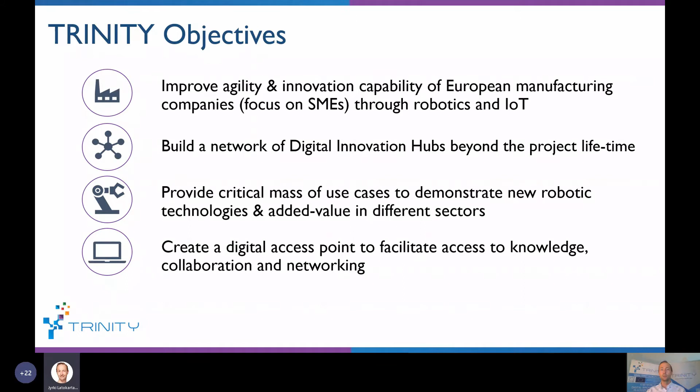industrial or company demonstrations. Okay, so Trinity is a Horizon 2020 funded project where our main goal is to improve the agility and innovation capability of European SMEs through robotics and IoT. And as all the digital innovation hubs, one of our goals is to build a digital innovation hub and a network that also exists after the Trinity project that will support the SMEs on these very topics, and they have a one-stop shop for companies to find information also after our project.

Trinity Consortium has 16 partners from 10 countries, so we represent Europe fairly well. We have altogether 9 research institutes and then companies and other organizations that support our Trinity goals. And we have 3 thematic areas where we focus in Trinity. Those are robotics, IoT technologies, and cybersecurity. So basically, all the activities are in these domains, and our focus is on agile manufacturing. There are other sister projects on robotics that work on maintenance and infrastructure, agri-food, and so on. But Trinity DIH together with DIH Squared is focusing on agile manufacturing.

Our concept is quite pragmatic. So the idea of Trinity is to showcase existing research results from different European projects, and those are so-called use cases; the core consortium of Trinity has presented 18 of them. And these use case demonstrations consist of different modules that we are polishing and making easier to adopt for the SMEs during the Trinity project.

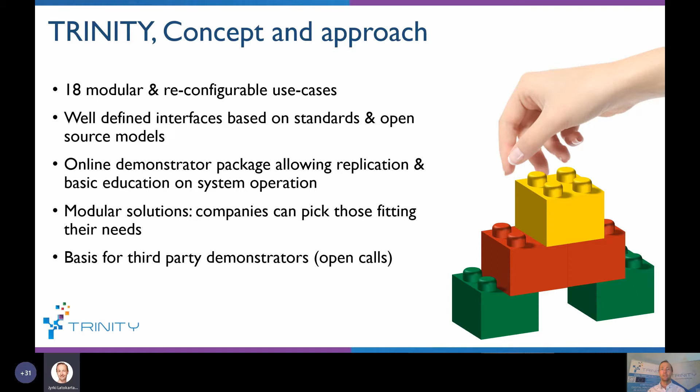We are now in demonstration program 1, which started this summer, and it will last for 12 months. And today, all the talks we hear are from the consortiums of our demonstration program 1. It was quite popular. We had 115 applications from 27 European countries or related countries in Horizon 2020. So altogether, nearly 300 companies applied for the funding. So it was quite a lot of work for the open call evaluators, technical and business experts, who evaluated the proposals for open call 1.

And then finally, after the checks and selecting these applications, we funded 19 proposals that cover 44 beneficiaries from 14 European countries, which you see on the map on this slide. And the total requested budget of these demonstrations was 4.66 million euros. They started in July, as mentioned, and they will last from 9 to 12 months. So the first quarter of the demonstration program is now completed.

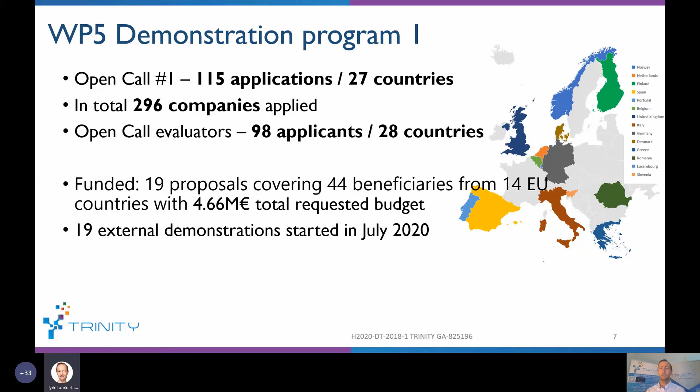From Trinity's point of view, each of these companies and consortiums that you will hear presentations from in this series of webinars has been assigned a mentor from the Trinity Consortium, and this has been quite successful, at least from the Trinity point of view. We now have much closer contact with the companies doing the demonstrations for us, and hopefully we as the consortium can also support them better, because we have some companies who have never received EU funding before or have not necessarily done much R&D activities in their work, so they can get different support from these mentors and hopefully succeed better in their own goals and in their future businesses and activities.

Before we start going into these demonstrations, a quick mention about Trinity's second open call. So during Trinity's 4 years of running, we will have 2 open calls, and the timeline for the second open call will be published in November. It's similar to the first call, but this time the maximum funding is slightly smaller, and we hope the demonstrations to be slightly shorter. The total budget for this second open call is 3.5 million euros, and we try to enhance the European dimension even more, so we are looking for multinational consortiums in our second open call.

Thank you for the introduction. I will now share my screen. My name is Halldor, I'm working for the Arctic University of Norway as a research assistant, and I am a developer for the Trinity project. I will talk a little bit about metal 3D printing, then about our internal use case, robotic welding and additive manufacturing.

3D printing is becoming more and more used in today's industry. However, it can be extremely expensive to invest in a large metal 3D printer. One example we have from UIT is that we have bought a hybrid 3D metal printer, which is able to print quite large parts with metal powder. However, the machine is extremely expensive, and also the powder is very expensive. Another method might be to use...

automatic robotic welding, combined with wire arc additive manufacturing, or WAAM, to 3D print parts using an arc welding process to create 3D metal parts. The benefit of using a robot arm is that you can print parts as large as the robot itself, which increases the flexibility, and you can also use it to repair parts. It can also often be very inexpensive to buy a second-hand robot and a welding torch, and then you can have potentially a metal 3D printer.

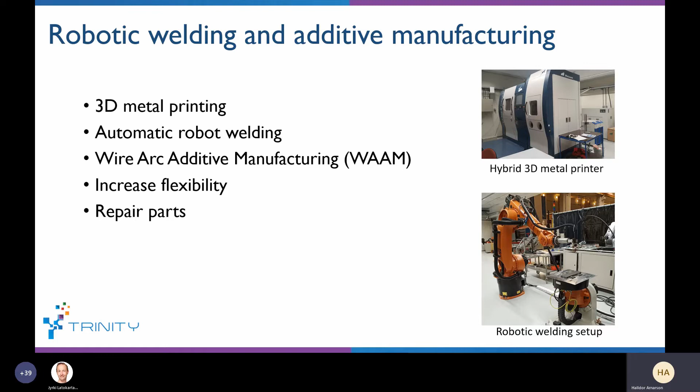Here at UIT, we are developing use case 5, an internal TRINITY use case, which is wire arc additive manufacturing with industrial robots. The setup of our system is that we have a KUKA robot, and then we have a rotary table. This enables us to do more advanced welds.

We also have a TIG welder. What is special about the TIG welder is that the robot usually has to move in the direction the wire is fed, and therefore having the rotary table enables us to do, again, more advanced welds. These three components, the KUKA robot, rotary table, and TIG welder, are connected to our KUKA controller. This is then part of our physical system.

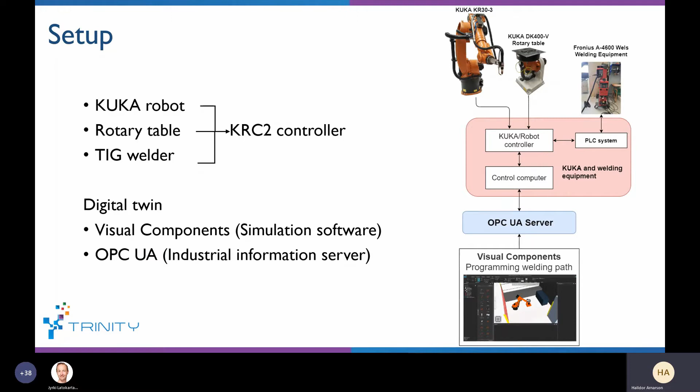We have then created a digital twin of our system, a digital counterpart, in Visual Components, which is a simulation software where we have created a replica of exactly our robot cell. However, to be able to connect our physical part and the digital part, we are using an OPC UA server. This is just an information server for sharing information both from the robot to the simulation software, but also from the simulation software to the physical robot.

So using the simulation software Visual Components allows us to use its functionality, which has a rather intuitive and simple programming method with drag and drop function, but it is also able to automatically generate paths. So if you have a CAD model and a path you wanted to move, you can press on the curve and it will automatically generate this path.

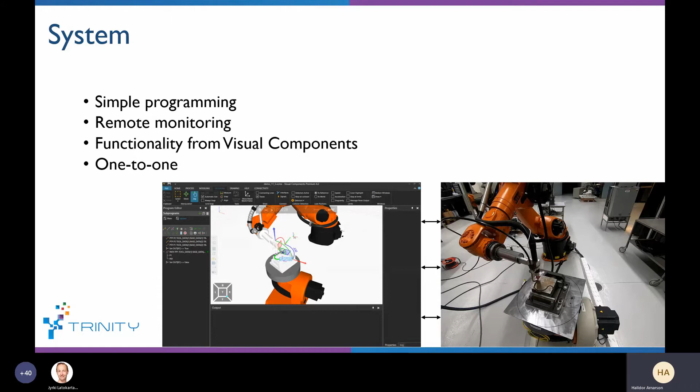You can also use the system to remotely monitor the robot while it is moving and welding, and again we get all the functionality from Visual Components. Visual Components has also been starting to add VR functionality, which we can add to our system to create an even simpler method of programming the welds. The system is made to be one-to-one, meaning just that 1 meter in the simulation software is 1 meter in the physical one.

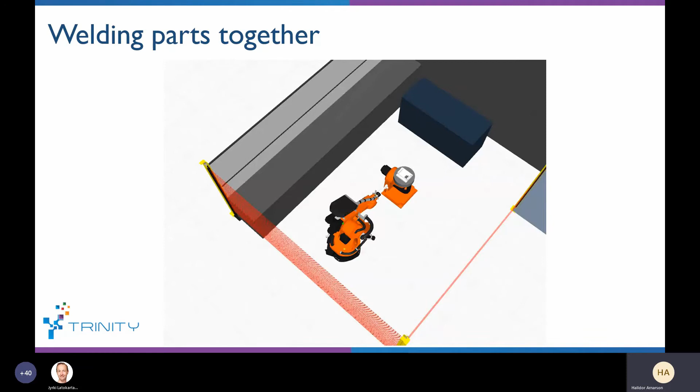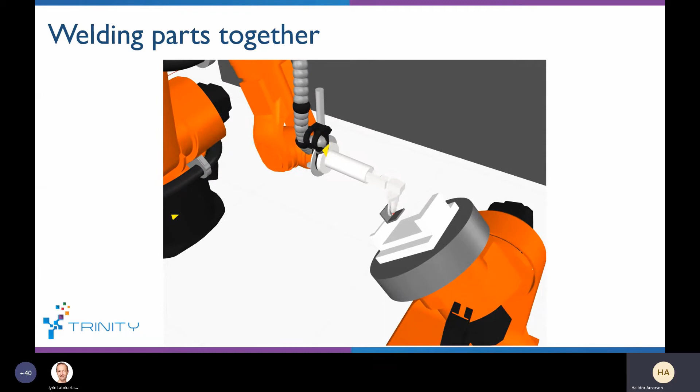Here I have a short video showing welding two metal plates together. So here we're running a simulation. This is to validate and reassure that the program we have created is right, there's no collisions, and it looks okay. And then afterwards, we can directly run this program, which we have created in Visual Components, straight on the physical robot without almost any intervention, which decreases the time it takes to program and set up such a system.

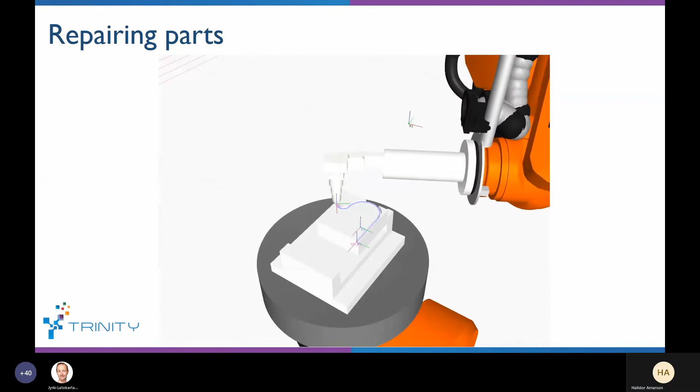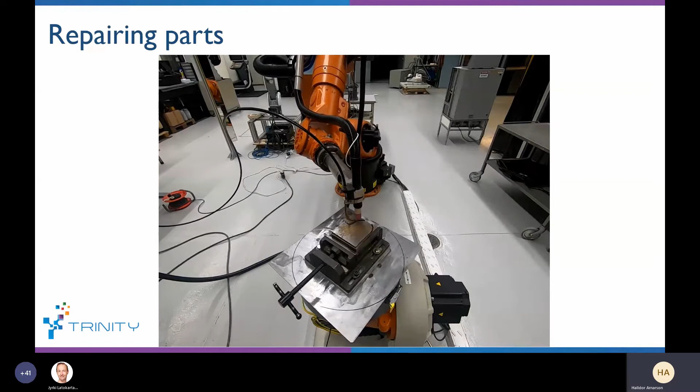I also have a second video showing using the path function. As I mentioned before, we can press on a curve and you automatically get the path the robot will move. This is to show filling up the gap by using welding, for instance, for repairing parts. And then afterwards, when you have programmed it, you can run it straight away on the physical robot. This time it's without the welding on, because you can't see too much of the movement, because the light is so bright.

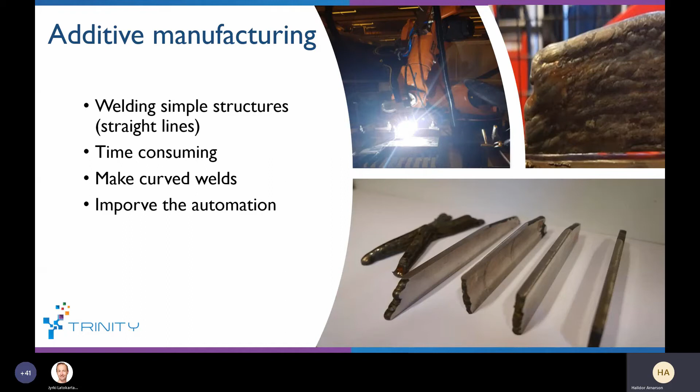So additive manufacturing, this system is also capable of creating structures. In Visual Components, we can create and 3D print simple straight lines, which we have done before. Our old program only allowed for straight lines, but since we have Visual Components now, curves. However, one problem we are having is that the process of doing this arc TIG welding is very time consuming because of all the heat. So one of our goals and what we're going to continue improving is to increase the automation of the system, to make it more automated, but also be able to create parts faster and also more complex and bigger parts than you can see here on the pictures.

So the benefits of our system. As I mentioned before, one of the benefits is easy planning and also having the ability to do offline testing. With our system, you can be somewhere else in the world, practically, as long as you have Visual Components. You can configure and make a new welding program and send it directly to the robot cell, which increases the flexibility quite a lot. Also, the method.

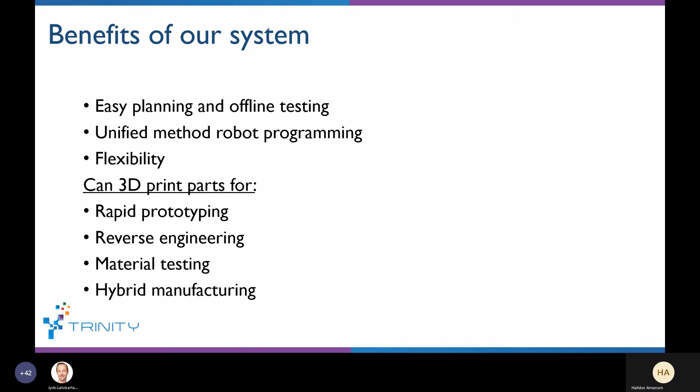And also the 3D metal parts that we print, we can use for both rapid prototyping. We can also do reverse engineering, material testing, and also hybrid manufacturing. Yes, that is it for me.

So there is a post processor in Visual Components, so I'm able to read all the points and all the XYZ coordinates of the program created in Visual Components, and then I take all of this data, also the speed. I have my own Python program which takes the data and sorts it and then executes it on the robot. So I have kind of my own Python translator that takes all the stuff from Visual Components and puts it straight on the physical one.

I have a quick question regarding the control. So basically I see there's a turntable, right? And it's moving according to, like, it's actually complementing the robot movements. My question is, how do you control that turntable and how is it synchronized with the robot?

Yeah, so here we come back to Visual Components. The great thing about Visual Components is that there is this drag and drop function, so you can just add the rotary table to the robot directly, and then it's kind of a part of it. So then you just have to jog the table and the robot, and then they all move simultaneously, and you can create very advanced movements, but in a very simple manner using Visual Components.

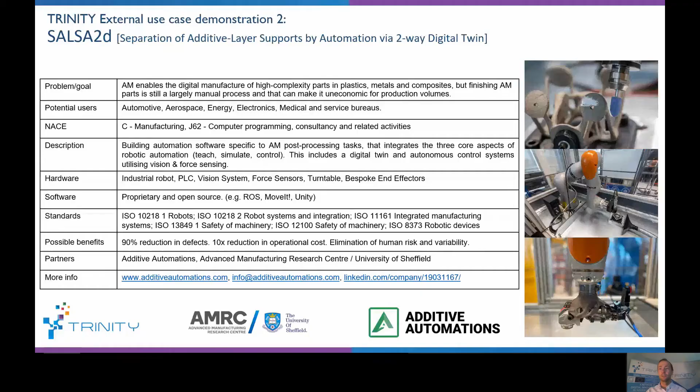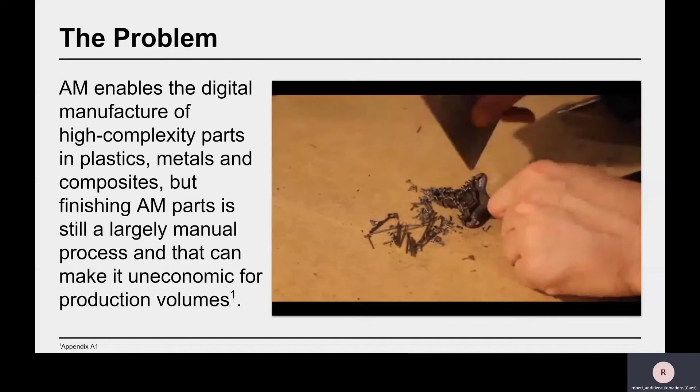Screen is yours. Good morning, everybody. I'm talking to you at the moment from the heart of Britain, up in the north of England, called Sheffield, also known here as the Steel City, actually sitting on top of some infamous Orgreave mines, which changed the landscape of industry in this country about 35 years ago. Now it's one of the most concentrated advanced manufacturing parks in the UK. It's got some companies such as McLaren, Airbus, Boeing, Rolls-Royce, and it also includes our partner who's also on the line, James Law, representing the University of Sheffield. We're working with them on this, and obviously with Trinity.

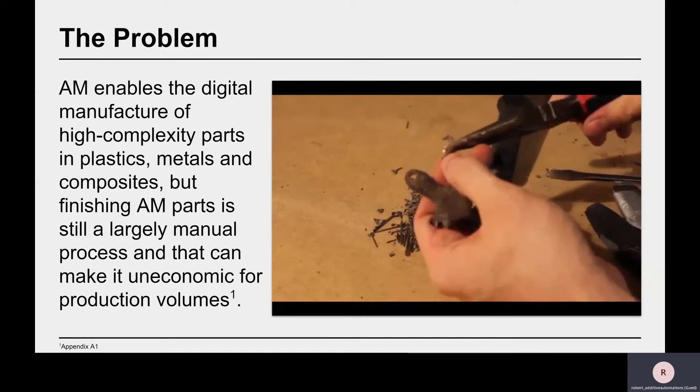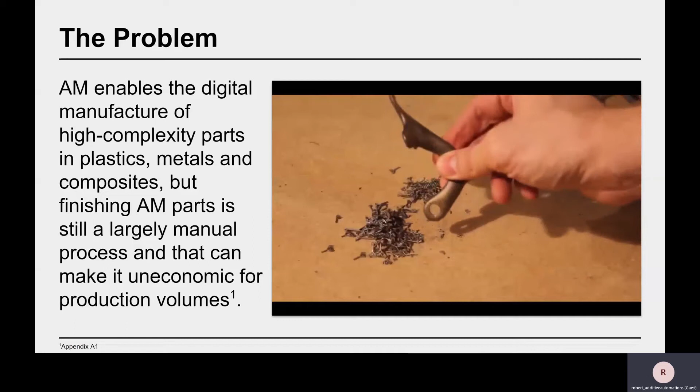So the problem that we're trying to solve in this project and the wider company is: AM enables the digital manufacture of high complexity parts in multiple materials, but finishing those parts is still largely a manual process, and that can make it uneconomic for production volumes.

So the mission is, A, eliminate the barriers to entry for using AM in volume production; B, complete AM's digital thread by automating those manual, dexterous and toxic steps; and C, bring dexterity and reasoning to industrial robotic arms through AI, vision and sensing systems.

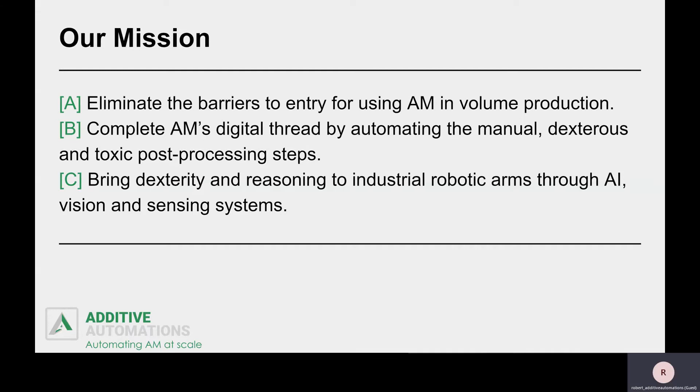Some of the benefits of the system will be: one, since a major source of defects is human error, a 90% reduction in defects across post-processing. Two, robots can do repetitive, mundane, strenuous tasks for longer and more efficiently, leading to a 10x reduction in operational costs. And also the toxic powder, such as nickel, cobalt, chromium, and some of the nasty tasks that can cause RSI - basically eliminating that, so humans don't do those and can do more of the creative tasks.

Our USP is that the economics of logic-driven or traditional automation doesn't really stack up for additive, for many reasons. So we're creating autonomous control systems using vision and force sensing to do that, and we're creating a software application - one that's integrated to do teach, simulate, and control, all from that one application.

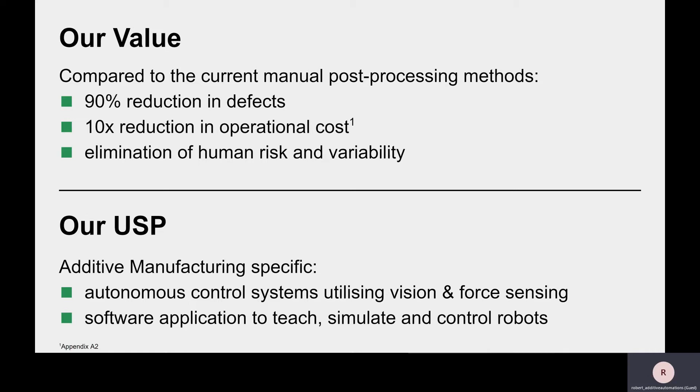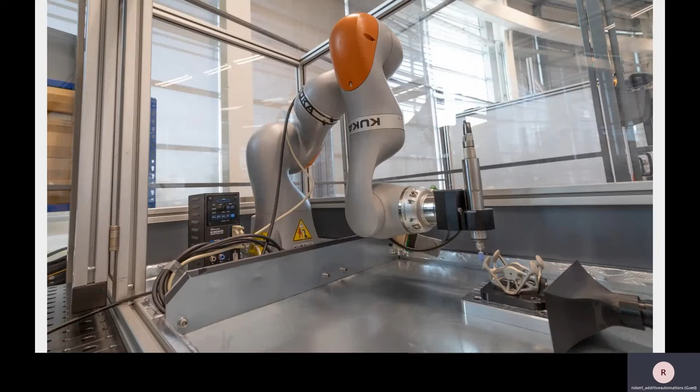So to really summarize the solution, it's all about building automation software that is specific to AM post-processing, integrating the three core aspects of robotic automation - teach, simulate, control. You can view more photos and videos on our website. This is our cell in one of the factories the University of Sheffield has. This shows one of the end effectors and one of the parts we're currently working on, which is a satellite bracket for aerospace.

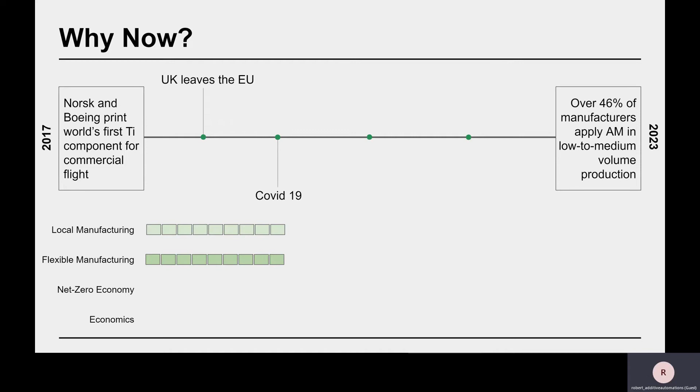Whether we like that or not, it's a fact. There are other factors, such as the US - and I'll get onto this - banning Huawei and other Chinese companies, and we do need to look at reshoring manufacturing. I think COVID-19 has again shown that reshoring manufacturing is important to manage that supply chain risk, but also have a flexible production line - the UK ventilator challenge, Boeing printing thousands of face masks in dozens of locations across the US.

Huawei, again, as I said, was banned in the US and in the UK, and is again another supply chain risk. So local manufacturing or reshoring of manufacturing. And for me, the most important, which is a net zero economy, additive manufacturing has huge capability here. It's got design freedom, it's got near net shape capability. So you've got opportunities for lightweighting, thermal efficiency optimizations, near one-to-one buy-to-fly. And you can change the product life cycle to prioritize refurbish, repair, and recycle.

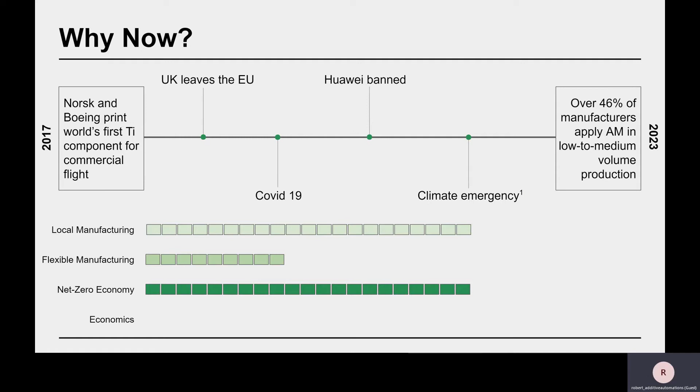And this one here is most important for me, this climate emergency, and to try to solve that. But we won't be able to get to this prediction of over 46% of manufacturers applying AM in low to medium volume production by 2023, unless we sort the economics out. And that means really reducing the current cost by a factor of 10. And that's going to be a combination of materials in AM, design, the actual additive process, but also automation. And that's what we're using robotics for, to really bring that cost of post-processing down by a factor of 10.

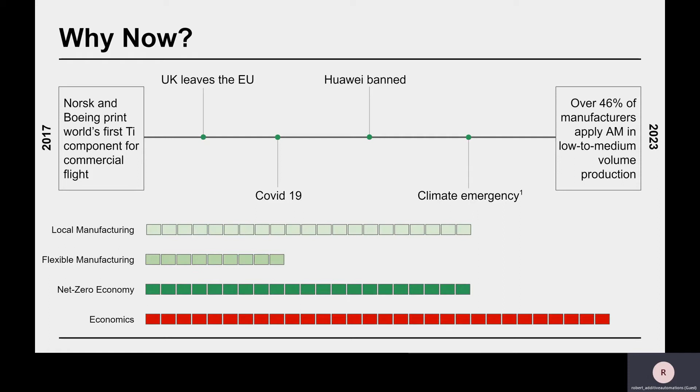And that's us. And that's our vision, really. In pursuit of a digital and sustainable future, we automate the additive manufacture of polymer, metal, and composite products. And I'd be happy to answer any questions.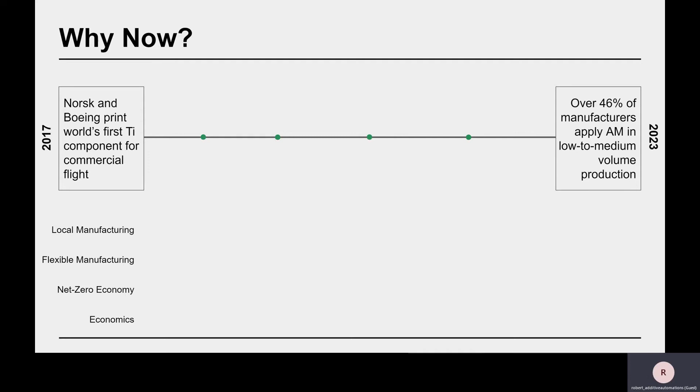From a technological point of view, what do you think are the most challenging things to solve if we think about robotizing these processes? Yeah, it's a really good question. I think the most tricky part here is control. And that's going to be partly solved with sensors. So we've got these 4 sensors and 2 vision systems, and that's because we've got quite complex parts, and parts that change between builds, but also within builds.

If you've used additive a lot, you'll know that not only does one build to another change in terms of tolerances, but also within the build, depending on where you build in that chamber. You can have quite different deformations and distortions, and while the parts still may conform, you need the robot to be able to adapt. And how do you do that without reteaching? Well, the answer is you can't.

So you need to bring human capabilities like dexterity, reasoning, real-time feedback, to a robot. And the only way you can do that is with sensors. So we're trying to do a hybrid approach with position, local and global position, and force sensors. And that's going to be the most challenging aspect of this. Sure is, yes. It involves a lot of sensors and calculations. So it's not just a simple machine tending application for sure. There's quite a lot of things involved.

Yes, the post-processing, the depowdering, platform removal, support removal, witness removal, these tasks between the print and the machining. Not all parts need machining, sometimes just inspection, but everything that happens between print and machining, or print and inspection, that's what we want to automate.

Tom is going to talk to us about laser cladding, also a very interesting project, but still quite a niche area, requiring quite a lot of specific expertise from the operators and the users, and also having a lot of very sensitive parameters which, if not controlled correctly, may damage quite an expensive process and workpiece. So go ahead, Tom.

Yes, hello, good morning. My name is Tom de Bruyne from Laser Cladding Venture. We are very happy to be part of the TRINITY Consortium. And our project is the LMD-AUTO project with the objective to automate laser cladding.

Good. You can see my next slide? No, you can't see it like this. Yeah. No. So laser cladding.

Our company actually offers two things. We do R&D in 3D printing with the technology, but our main industrial activity is wear protection for critical assets. The example you see here is a petrochemical barrel of a compounding installation, and typically we would line it with, for example, Stellite 21, which is a cobalt chrome alloy, and in the laser cladded state it features extra hardness, so it creates better wear resistance. The technology that we use is laser cladding.

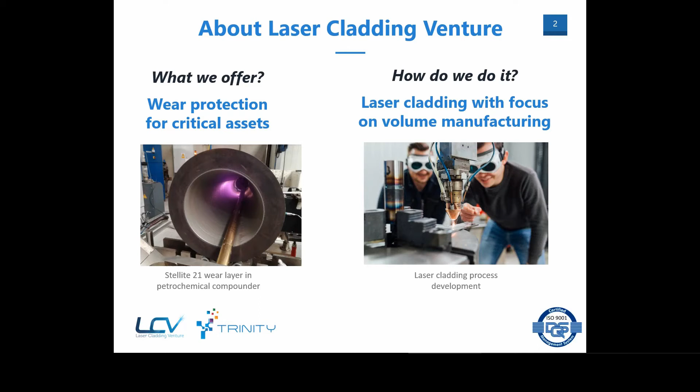And basically, for us the focus is that we do not apply it for repair applications, but mostly for volume applications. That's our goal. If you see the opportunities we have, then I think we have a strong USP in that hard-facing niche, but we also have challenges.

The USP is that with laser cladding, a welding process where you apply laser power and you create a specific metallic structure, a bit across the board, laser cladded coatings are up to 20% harder than conventionally welded or thermally sprayed coatings. It depends a bit on the material type, but in general you can expect extra hardness.

And what we also see, both in lab testing and in practice, quite often the extra hardness or the better metallic structure results in an improved wear resistance, up to 4 times or even 8 times we saw already. So it's a strong USP. But on the other hand, there are still definitely problems and issues.

To really apply this USP for volume applications, we need to improve the uptime of the machines. I think machines in a factory environment should have 80% uptime, to combine productivity together with flexibility. The yield loss should be below 1%, and ideally in per mille. And also the machines are actually not turnkey, so it's relatively difficult to have them active 24/7.

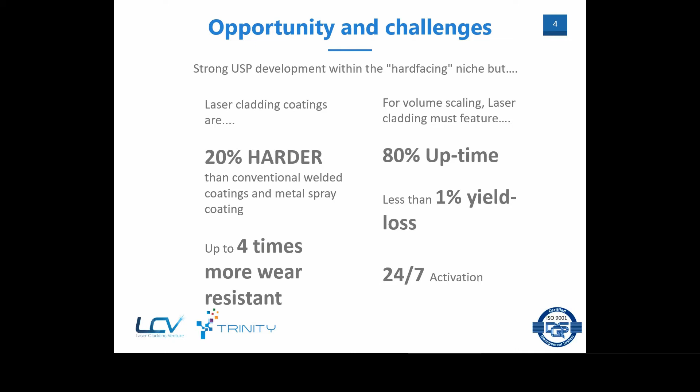Good. So if you look at the technology itself, it's actually two things. It's a welding process. We use laser power, we project metallic granulate, powdered material, and we melt it on a substrate. You see how the process looks, and we apply a wear-resistant layer. Basically, if you control the quality of the melt pool, then you can control the quality of the clad.

Another thing is the upstream process. The upstream process is, basically we have a robot that controls the laser cladding head, and typically also a motion system for the substrate. We have a powder feeder, we have a laser, connected to a controller. These are the elements of a laser cladding installation. To control the quality, you need to control the upstream process, but also the downstream process.

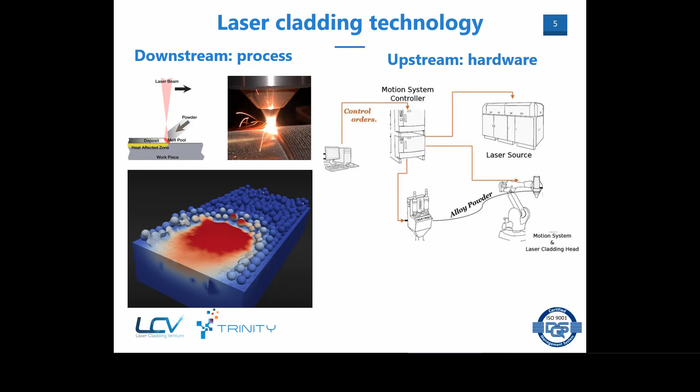If we look from our experience at what the problems are, first of all you have quite a lot of failure modes, also because we use high power lasers between 1 kilowatt and 12 kilowatts. You can have upstream problems, for example overheating of the clad heads, problems with the feedstock, with the powder feeder, etc. But you can also have downstream influence of the substrate, your welding process can become unstable, etc. So you have quite a lot of failure modes that can affect the quality of the clad.

The second thing is that, as we do it today, the process is really operator driven. It's the operators who load the machines, who set up the machines, and it can be quite cumbersome. And it's also the operators who are checking the process every 5 or 10 minutes to see if the melt pool is stable, to check a number of sensors in the installation, etc.

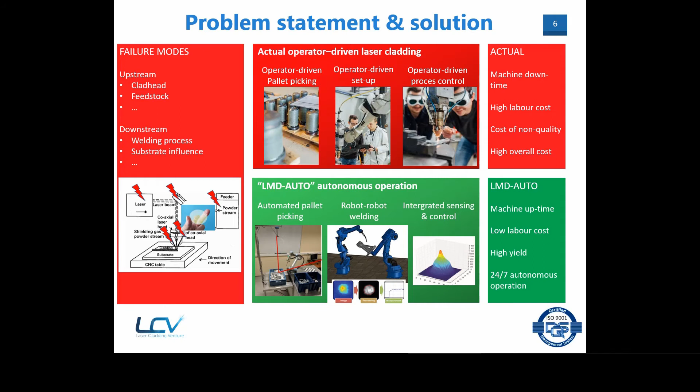Good. Then, if you see the objectives, I think probably the most innovative objective for LMD-AUTO is to enable the turnkey operation by process control. And the crux is really that we have quite a lot of process know-how on laser cladding with the engineers and with the operators, and we want to implement that knowledge inside the machines using Industry 4.0 technology.

So it means that there are a number of sensor technologies, both used upstream and downstream, welding procedures and methodologies to control and correct the clad. Experience that we apply today, work instructions, etc. And we want to implement that into the machine. So what we're doing there is we have a controller box, we have sensors, and at the moment it monitors. There are already alarm functions, and we want to migrate to active control.

The first step is that we, as I said, first apply the existing experience and working methodologies that we apply today in the operator-driven operation of the machine. We want to apply that into the software model. I think the next step is that we will make true use of the large data quantities that we gather to achieve more insight into machine operation and the quality of the clad. And then what we think is that all the expertise should be inside the machine, and that will then enable a shift from white collar to blue collar.

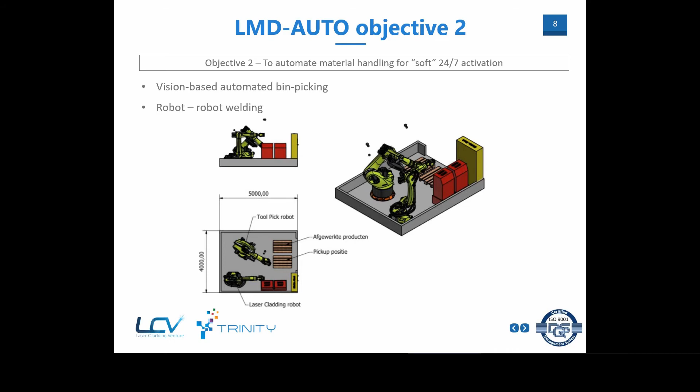Then there are a number of other topics that we also could work on within this LMD-AUTO concept, but they're a bit outside the scope of this TRINITY project. Good. Thank you. That's my part of the presentation. So if there are any questions, I will be happy to hear them.

Yes, thank you very much, Tom. We still have some minutes for questions and discussion. I guess the process control you are planning in TRINITY is something that can be applied for other similar processes as well. But for the second objective, on this bin picking and robot welding, have you had time to test it yet, or do you see it as a simple task to complete, or what kind of challenges do you think there are in that approach?

Yeah, I think ideally you have one system that has the flexibility to deal with a number of different parts and geometries. We tested it already on lab scale, and there you see indeed part recognition and so on works very well. The other thing you see is that there is a difference between picking up a part and completely aligning a part so that you know this is the starting point for my clad, for the CAM program. And there we see there is still a challenge on how to completely do alignment after the part is picked up automatically, and knowing the exact start position for the clad program.

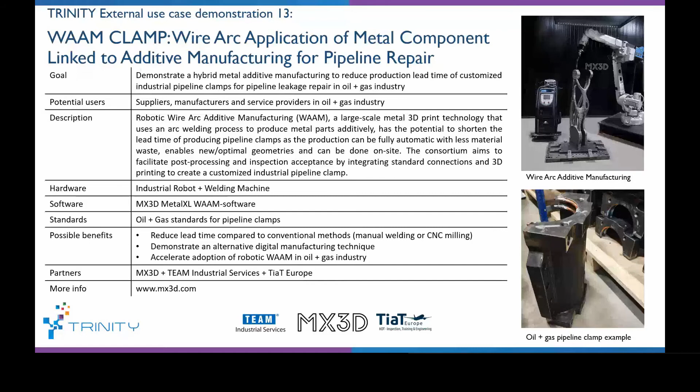All right. Thank you for the introduction. My name is Thomas van Klaarbeke. I'm an R&D engineer for the 3D metal company MX3D. MX3D does large-scale additive manufacturing. And within the TRINITY project, we have two other partners to tackle the production of components for the oil and gas industry, more specifically clamps for pipelines.

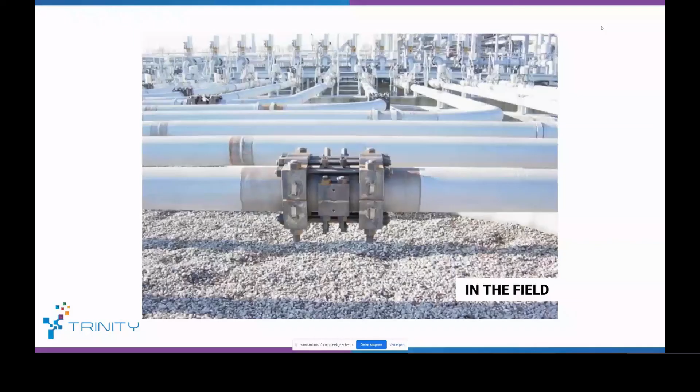So what are these clamps for pipelines? Well, there are many different types of pipelines that transport different types of fluids. This can be water, but this can go all the way to very corrosive or dangerous materials. These pipelines, of course, need maintenance, and sometimes a leak can be expected or a problem can be projected. In that case, the pipeline needs to be fixed, basically bandaged, just like pipes in your sink. If you have a hole, you need to patch it up. But in the oil and gas industry, this is on a much higher level and in a more secure way.

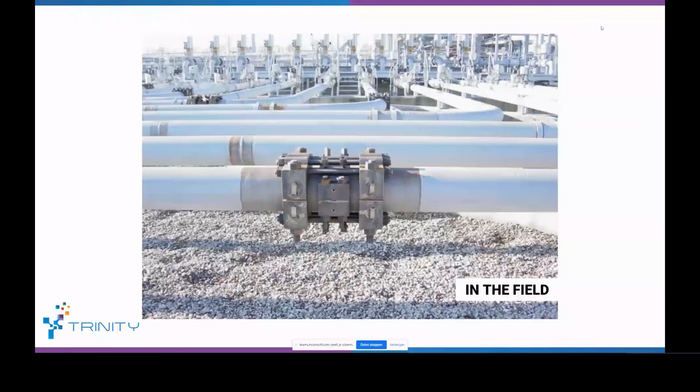So if a leak is expected, these types of clamps are rapidly manufactured and put on the pipeline. In an even worse case scenario, when there's already a leak, the pipeline is shut down, and this can cause losses of hundreds of thousands of euros to even millions of euros. If an oil company shuts down production, it costs a lot of money. The production of these clamps needs to be done rapidly. Currently, this is done either with traditional manufacturing such as CNC milling, so these blocks are milled from slabs of metal, or they are manually welded from sheets of metal.

And this brings me to the group we have established for this consortium. The first partner is Team, who is currently designing, manufacturing, and installing these pipeline clamps. The second party is MX3D, responsible for large-scale additive manufacturing of metal components. The third partner does NDT inspections of metals and other materials.

So first of all, Team: currently they are using CNC manufacturing, so they're manufacturing these clamps from metal slabs, or they're using manual welding. Of course, there are many different values that come into play when a clamp is produced, such as the design. This could be a material with very high standards that needs to have a lot of certifications, and then already a certain preferred design and material grade is picked.

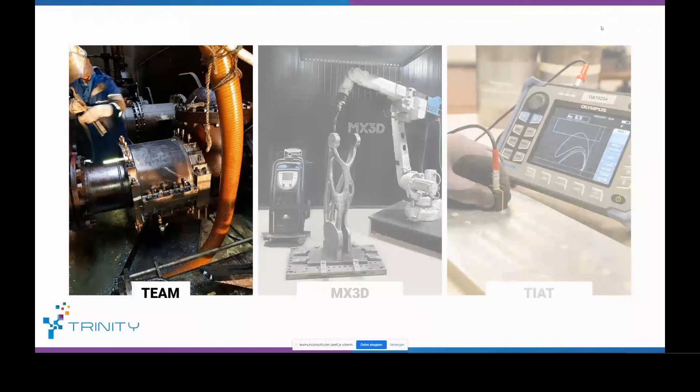But it could also be that it needs to be installed very quickly, and that there are more manual welders available, so then they could opt for a different production process. So depending on the request, a different manufacturing method is chosen. Of course, these are always produced very rapidly, but there are always things to improve, such as material usage, or, for example, downtime, or smarter planning of resources, in case, for example, certain machines are already booked, etc.

The second party, MX3D, that's us. We are experts in additive manufacturing. What we do is basically create 3D metal shapes additively. So we're not subtracting from metal slabs, but we're building them up. And what we are using is wire arc additive manufacturing. This means we are using a standard welding machine, and we are basically putting down weld on top of weld on top of weld to create geometry.

So what you see here is a component for the heavy industry. It's a machine part, and this consists only of welds. And WAAM is known for being a very fast production process, because it has a production rate between 1 and 7 kilograms per hour. So this part in front of us is about 90 kilos, and it had a printing time of about 4 continuous days. So this is considered very fast for metal printing.

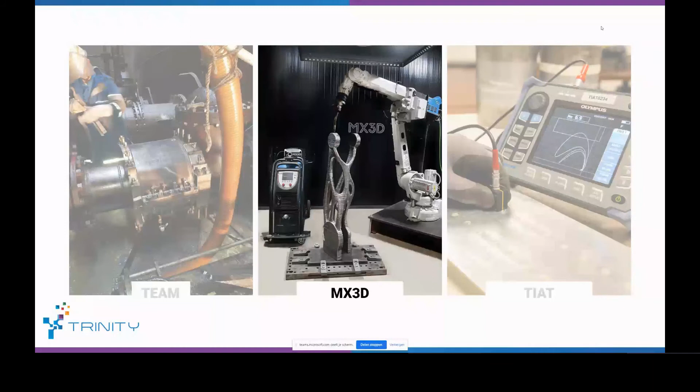The third party involved is TIAT. They're responsible for NDT, so non-destructive testing, and they do the inspecting and certification, so to say, of these materials. So depending, of course, on the requirements of the clamp, TIAT can give their approval that it meets its requirements.

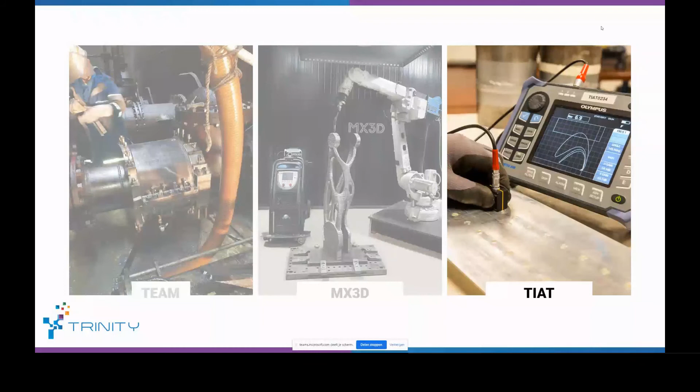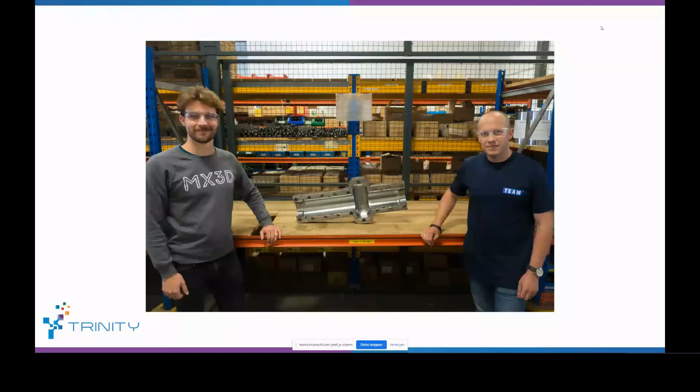So for the Trinity case, we are currently looking at the many different clamps that Team is producing and installing. These can range from very small pipes in diameter to very large ones. And of course, certain manufacturing methods are more beneficial than others for certain dimensions. And currently we are orienting ourselves where WAAM and the existing production methods meet best for what shapes.

To give you an impression of what WAAM can do, here we have a pipeline connector, which is fully additively manufactured. And it had, I think, a printing time of about 1 or 2 days. So this shows how the technique can be used to create spare parts or replacement parts very instantly. And because we're using welding wire and robots, this can be done in many different locations. So this is an added advantage as well.

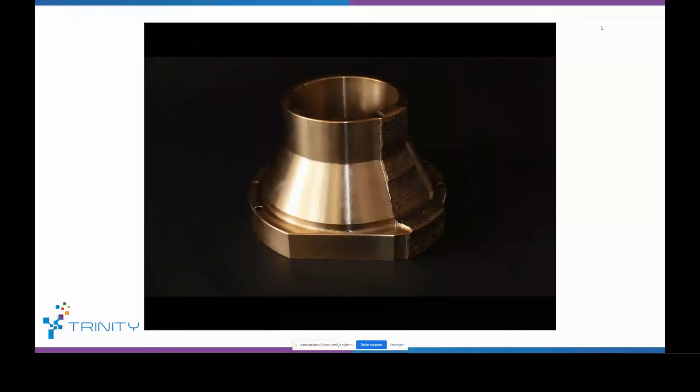So if you're thinking about remote areas or areas on the sea, for example, you could have a very flexible manufacturing solution that can create many different parts. Instead of having, for example, a milling machine where you can only trim down metal blocks to a certain dimension, you can now build them up to however large you want them. And instead of having manual welders available, skilled laborers, which is unfortunately a skill that is harder and harder to find, WAAM can provide an automated replacement solution.

So as I was saying, we're now looking at the many different types of clamps that are being used, and we're orienting ourselves together with our partners in the industry. And our goal is to provide an alternative manufacturing solution to the existing options. So to the existing CNC milling or manual welding, we want to do a hybrid approach where we use the advantages of each process. Well, mainly CNC. We're not thinking about manual welding anymore because we want to eliminate that.

So we want to take the advantages of CNC milling, which is, of course, being able to very precisely fabricate metal objects. And the downside of CNC milling is the material wastage and, of course, the size of slabs you need. The advantage of WAAM is that we can print whatever we need at a very high pace. But one of the disadvantages is that it's near net shape, it's welding. So it's relatively rough compared to CNC milling.

So for the Trinity project, we're looking at what we can do for the oil and gas industry for the flexible and automated production of oil and gas components. And together with our third partner, TiaT, we are also looking at how we can certify the production of these components, because metal AM currently is in the beginning phase of certification. So this is definitely a first step towards it. And we believe that with our consortium we can provide the base steps in providing these manufacturing methods for the industry.

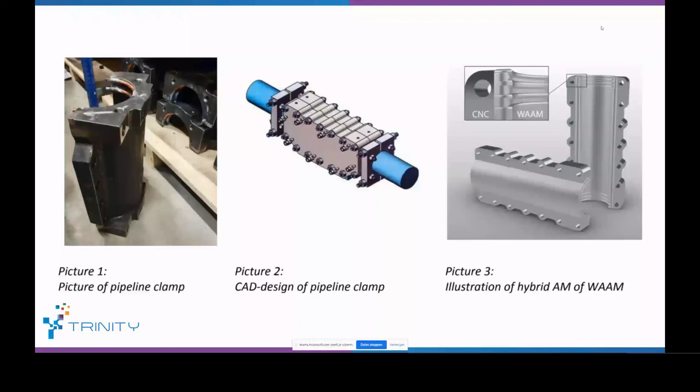As a final slide, maybe our one-pager. Our goal for the WAAM clamp project is to reduce the lead time compared to other methods. Of course, we're not going to be able to reduce the lead time for any type of shape of pipeline clamp, but we have a few in mind that can benefit from it.

We want to demonstrate our alternative manufacturing technique where we combine CNC milling, or computer-operated processes, together with wire arc. And together with TiaT and the whole partnership, we want to accelerate the adoption of WAAM technology in the oil and gas industry, because it's in a very early phase. We believe that by printing a demonstrator clamp and proving its quality features, this will be a good step towards the right direction in adoption of metal AM.

So this was my short presentation of our WAAM clamp, and I'm looking forward to your questions. Thank you very much, Thomas, for the presentation.

It's a very good question. Residual stress is indeed a very big topic within the WAAM world. There are ways to avoid it to a certain degree, by designing in such a way that you avoid heat buildup in certain areas, or by doing intelligent path planning, so intelligent weld deposition.

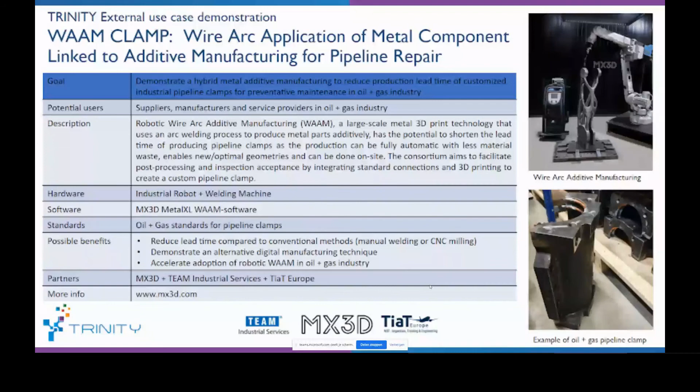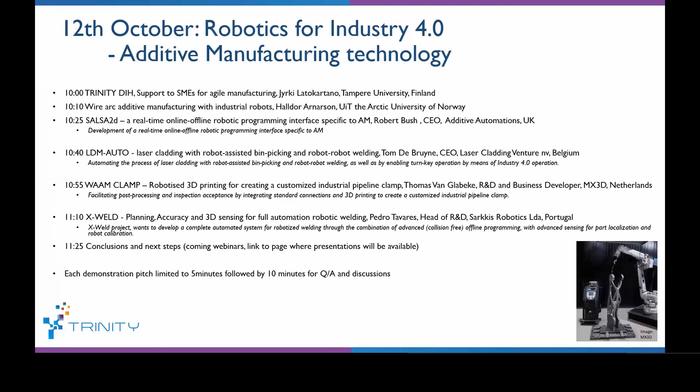This is X-Weld, presented by Pedro Tavares, head of R&D at Sarkkis Robotics in Portugal. All the processes we have discussed today are welding processes, so X-Weld fits quite well into this group, and there are some interesting technologies that X-Weld is working on. I think these 3D sensors for part localization and robot calibration can be used in many different processes, not only welding. But let's let Pedro talk more about it.

Thanks for your presentation of the project. Our objective is to tackle some of the difficulties that we typically find on the shop floor for steel industries and other industries, but in this scope, for welding in the steel industry.

I believe what I'm going to say now isn't new for most of you. Industrial robots are a mature technology. They are a catalyst for production. However, their full potential applications are still unexplored. This is why we can see this in the currently collaborative robot phenomenon. We can also see this when we compare the number of industrial robots against the number of machining equipment, and this has a reason for it.

During this project, we want to tackle the two main limitations in robotics and welding robotics. This is essentially the limitation related to the accuracy of industrial robots, and then the complex sensing procedures that are needed to automatically generate paths for the robot.

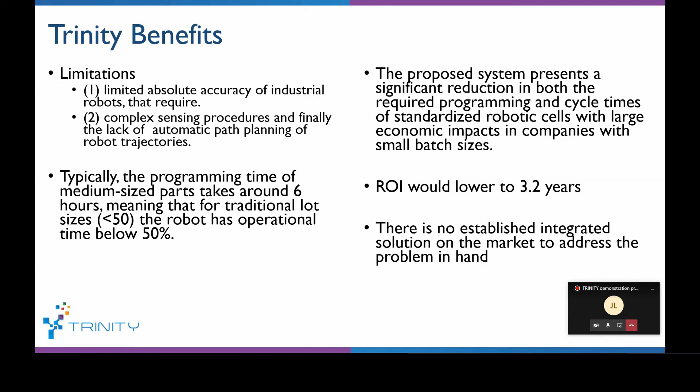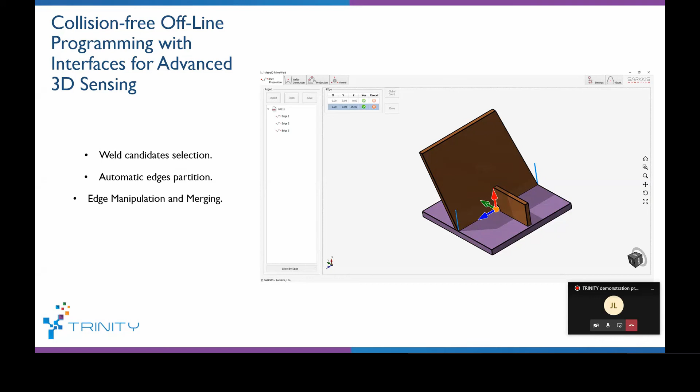So in that regard, we are going to diversify our solution into 3 branches. The first one is offline programming, where by parts we identify the welding candidates. We merge possible welding candidates and also take a 3D model of a part and detect where those candidates are, where you need to segment those edges, which edges are good to be welded, and so on. Then we generate collision-free movement vectors.

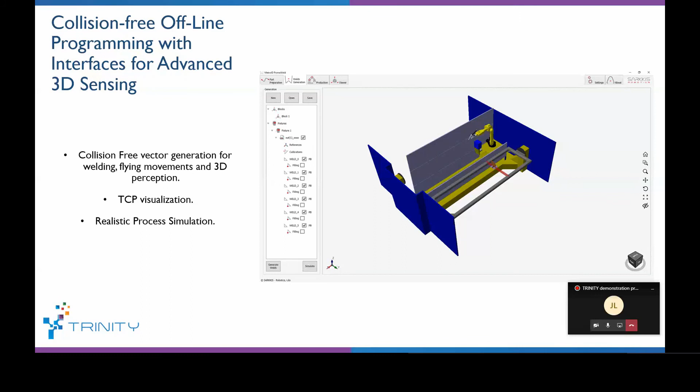Vectors for the robot movement, for welding, for 3D perception, and so on. In this branch, we are also able to see how the TCP behaves in every part of the process, and we'll have a realistic process simulation of what is going to happen in the real work cell. And then, of course, we will have a final tab that is able to produce and control the production of the robot, and control the machine and the robot itself.

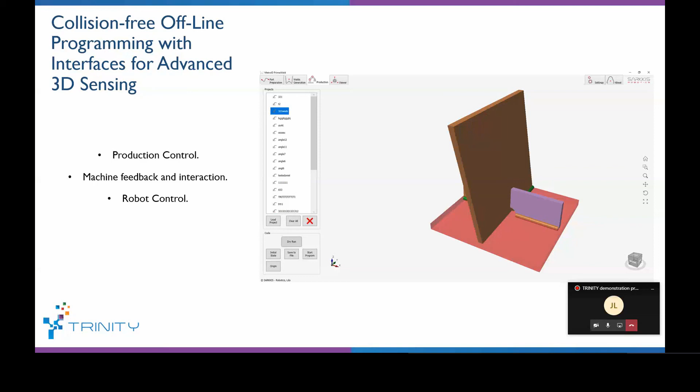This will be accomplished using active perception and sensor fusion. We can consider this as a result of integrating both local sensors and global sensors, and this will have a key part in the project as it will allow us to predict failures on the part and adjust the welding

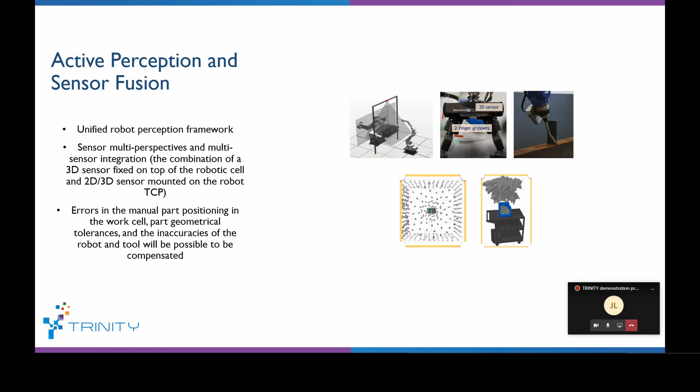seam. And then we will also have 3D sensing for robot absolute accuracy, where we can detect deviations. We can also detect deviations on the tool, and we can automatically calibrate that tool, which will be the welding torch.

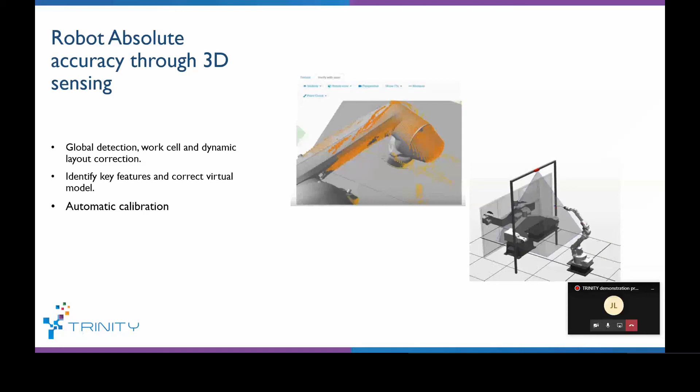So to have the local perspective of the sensing, we are exploring two segments of the market. One is the 3D low-cost small sensor, such as the Intel RealSense or the Orbbec, and the other is typical industrial lasers. This can be laser lines or laser dots, but we believe both approaches have some qualities.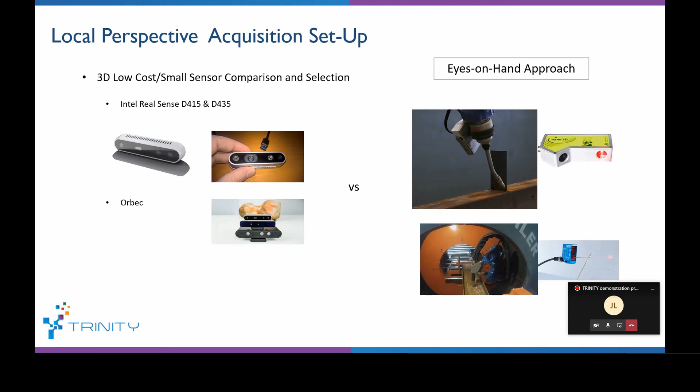The first one, the cameras, will allow us to have a wider perspective on the project and on the part, but they are typically scientifically proven, not industrial related. The second one, the lasers, are already validated in industrial facilities. So we start with them, but we intend to move on to the cameras.

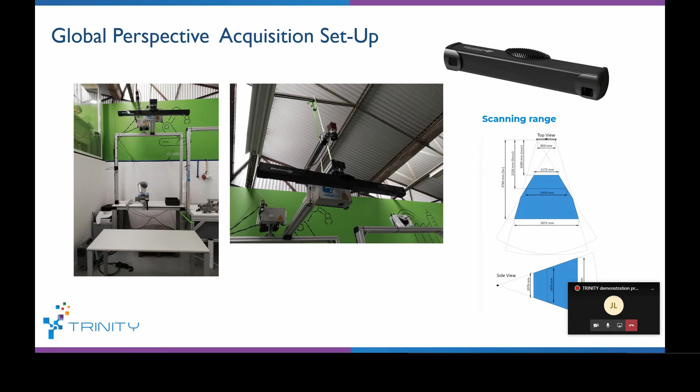And then the global perspective - this is a setup scenario that we have at one of the partners of the project, this is INESC TEC. We have a global sensor that allows us to visualize the entirety of the work cell, and we draw every kind of interesting measurement on the part, on the robot, on the tool, and so on.

This is how we intend to identify the object, identify the parts, the torch, and what steps we need for this sensing. Of course, the output will be an interactive, virtual work cell that will be always updated, and based on that work cell we can compute the programming for the robot.

So just to summarize the idea of the project: we are going to insert a 3D file, a CAD file, into our offline programming software. This software will generate welding candidates, then generate the vectors for those welding candidates, and send a message to production control that will generate robotic programs.

And then we will input some information from the 3D global sensor vision, so that we can correct the robot and part localization, the robot accuracy of the joints, and then we can also update the calibration of the torch. Then we will have a 3D local vision where we can detect with higher precision some faults that the part may have, and when correcting them, we can have a better perspective on the problem, ensuring a better weld.

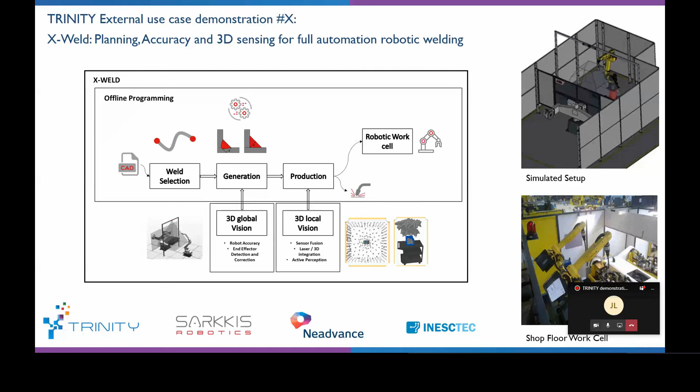And so that's the presentation.

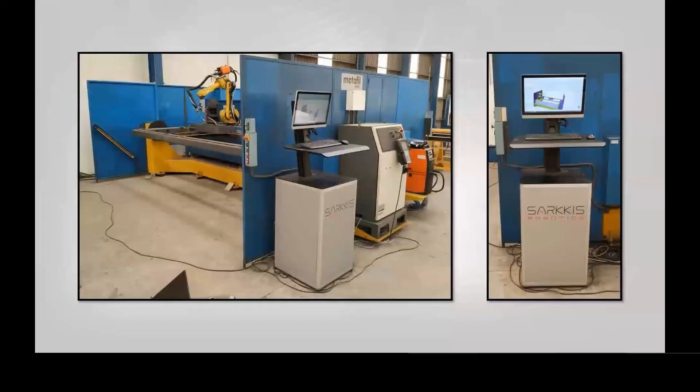It's obviously still in the early stages of the project, but I believe this should be a good example of what we want to achieve. And that's it, I'm ready for some questions if you have them.

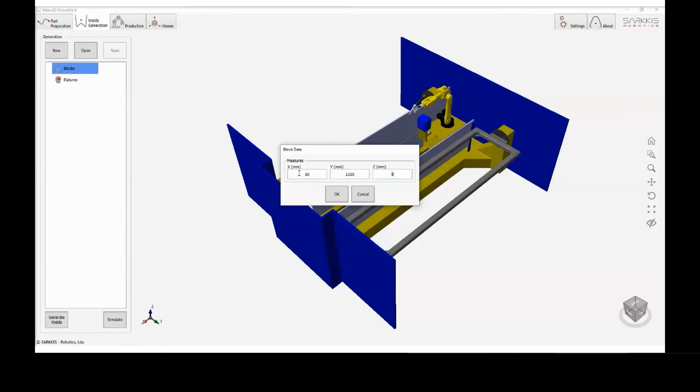Thank you very much, Pedro. Any questions on this topic? I think it's a quite interesting approach, and it can be applied in many different offline programming applications. Any questions to Pedro?

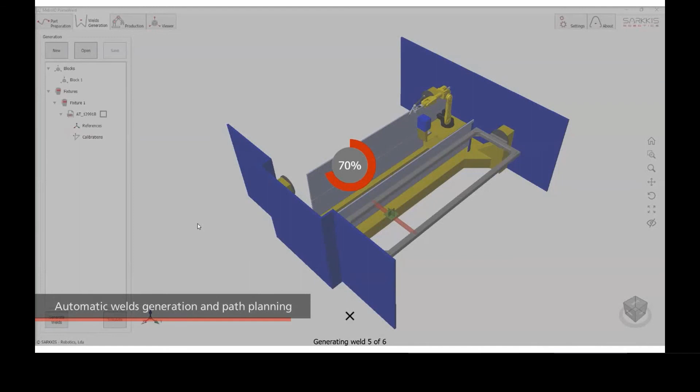So the focus of your demo application is arc welding, which is quite programming intensive as such as a robot process, but have you plans on maybe also moving this to a different application? Are you purely focusing on the arc welding?

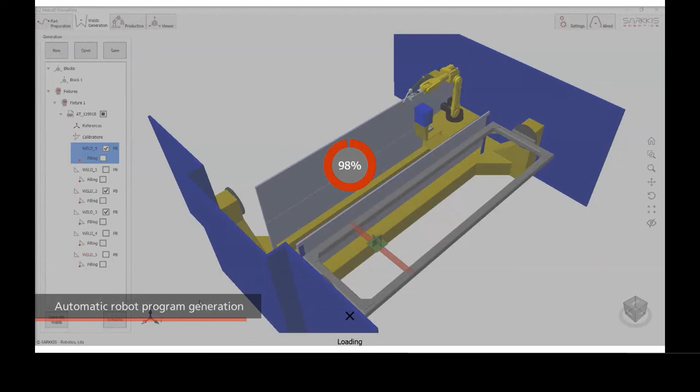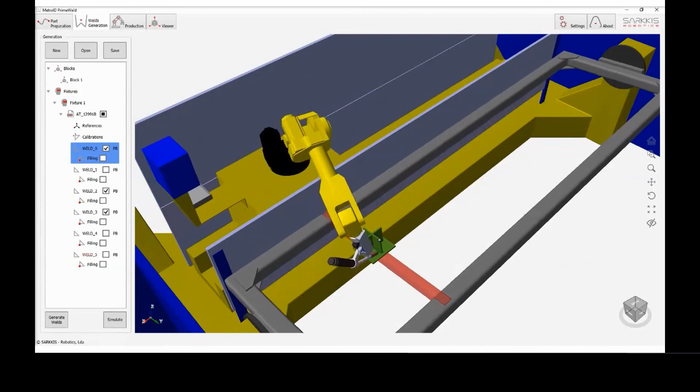Yeah, our focus is obviously the steel industry. At Sarkkis, we believe this can be further developed to other markets, but our main goal at the moment is to focus on steel industries, maybe some pipeline industries to do some sprinklers. But essentially, it's around industrial facilities with steel fabrication. So that's our goal.

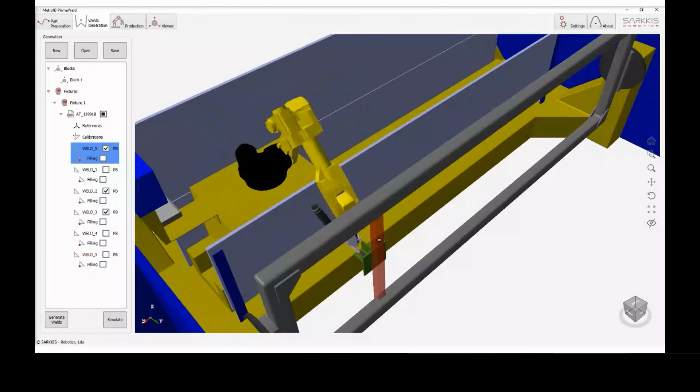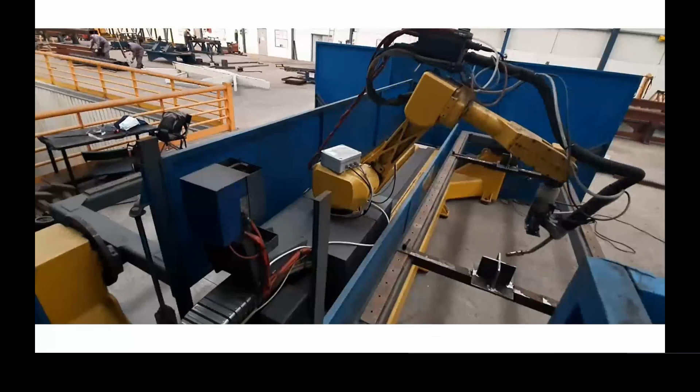Yes, and the plan is to create a system that includes both the scanner hardware and the software for the offline programming that utilizes these sensors. We believe one can't live without the other. We believe that the key for industrial success is to have a good sensing and then a good offline programmer, so that we can have the best of both worlds and ensure everything on the welding process.

So the idea is to have a bundle that should include the vision sensing and also the offline programming of the robot. This can be generic, and we don't limit it to any kind of brand. This is a generic software, so we can just select the robot, select the components of the work cell, and autonomously adapt to the work cell and to the requirements. So that's the goal.

Okay, thank you very much. Any other questions to Pedro? Yes, so basically funding, do you have some expectations from Trinity where we could support you on this process?

Yeah, sure. First of all, I would like to thank our mentor, Igor. He has given us some good ideas on how can we proceed with the process and with the solution. And essentially, what we require, or what we would like to have, is some feedback on the direction of the project, and having some kind of using your own software solutions and try to integrate them in our solution and see if everything.